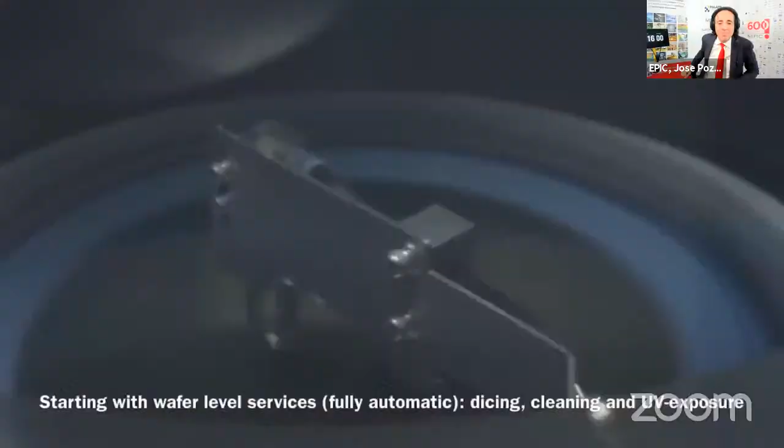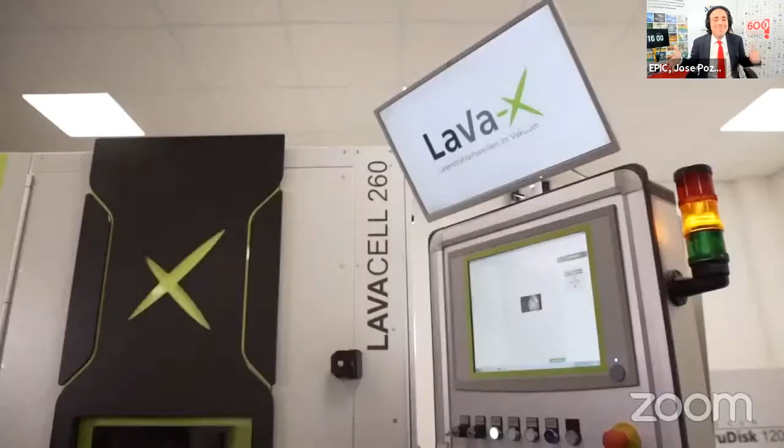Ladies and gentlemen, we are live. I'm super excited today. It is the 30th of March, and most important, it is 2 days away from my Easter holidays, so I'm in the brightest mood you've seen me in a long time. I have something really special for you: six huge developments of EPIC. I'm really happy to show them to you, but most important, I'm happy to ask them the EPIC question and make sure they tell us what they can do for the other members and what the other members can do for them. It is all about a business connection.

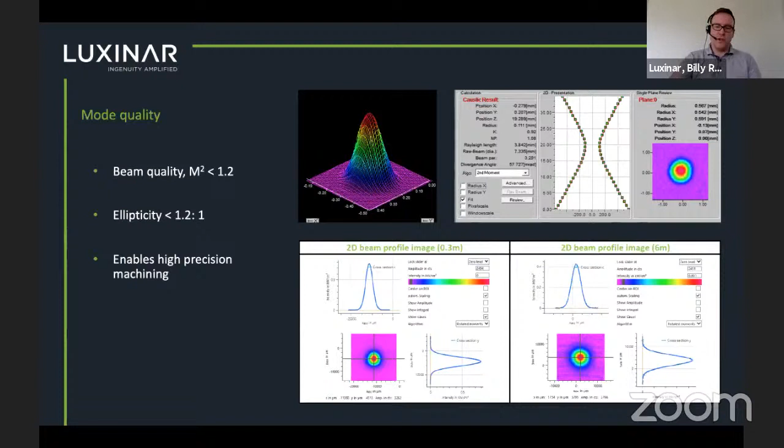Just a quick look at some example applications of material processing using these lasers. First of all, this is comparing a standard CO2 laser with a CO2 laser with integrated AOM for machining of 3-layer polarization film. You can see on the right-hand side, the material processing with the CO2 laser with AOM produces approximately 30% less heat-affected zone compared to a standard CO2 laser with longer rise and fall time pulses.

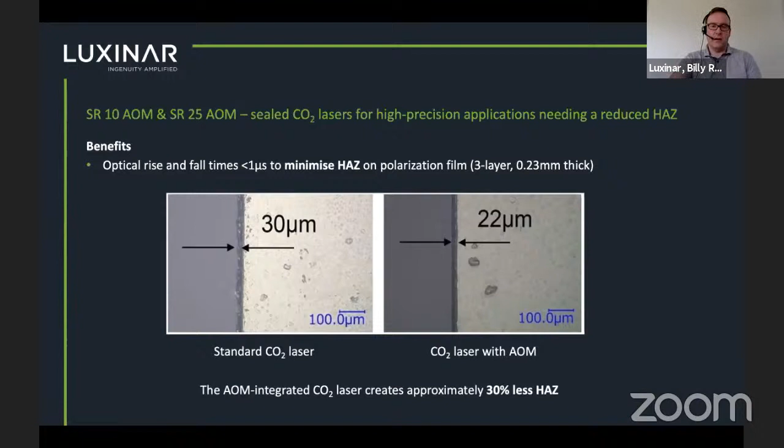Similarly, looking at a 5-layer film here, this is a material where you would only partially process the material, so only some of the layers of the film you would want to process. A problem that can occur with these materials is that the layers will melt and stick together with the neighboring layers. But using a Luxinar SR25 AOM laser here, you can see that you get a much cleaner cut quality compared to a standard CO2 laser.

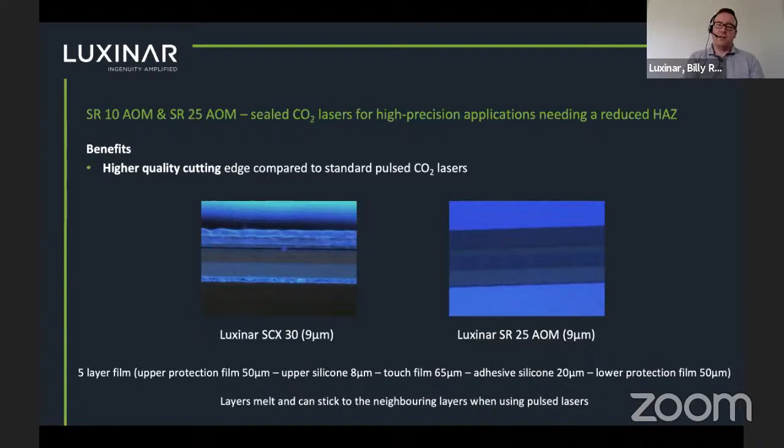And finally, it's a similar story here with heat-sensitive indium tin oxide layers. They can suffer discoloration and also poor cut quality using long rise and fall time pulse CO2 lasers. Again, here we see a vast improvement in the cut quality using an AOM laser.

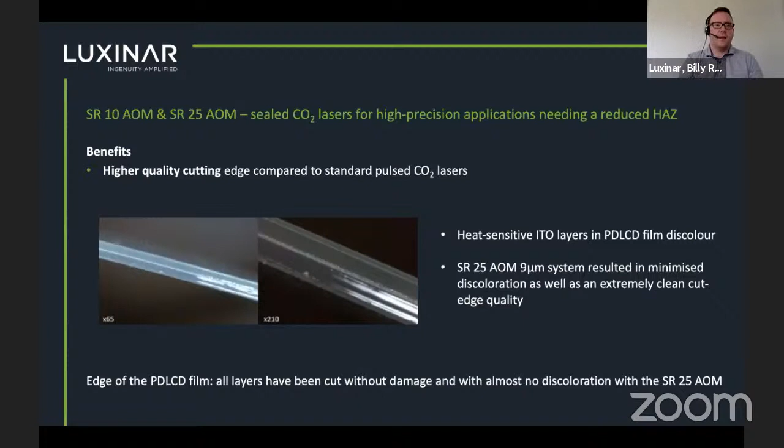So applications that these systems may find themselves useful for include microfilm cutting in the flat panel display market. For example, backlighting unit is a very common material that is processed using these systems. Any kind of scribing, engraving, marking, or surface patterning application that needs a reduced heat affected zone - depending on the particular material being processed, this can be very important. And then other thin film applications, such as those in the automotive, electronics, lighting, flexible packaging, and flexible printing industries. Again, kiss cutting is a very common application for these systems.

So just quickly in summary, this is Luxinar's new SR AOM range of CO2 lasers with very fast optical rise and fall times of less than 1 microsecond for high precision processing, energy control, and reduced heat affected zone. Available at wavelengths of 9.3 microns and power levels of 75 watts and 150 watts. Pulse widths available are from 2 microseconds all the way up to CW, and they incorporate power loop control as standard for enhanced stability.

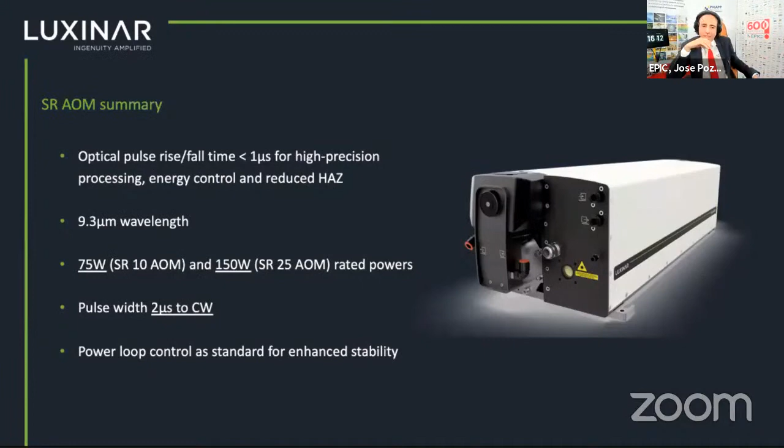Sure. Billy, I was very excited to see the kind of power that you can reach with your laser, and also you talked about the M squared, you mentioned I think it was 1.2 in your presentation. But for many of the applications you were targeting, it's not only about the power, but about the power stability. Do you have some metrics on that, something to share with us about the power stability of the AOM range?

We are seeing the market for laser engraving growing dramatically for larger and larger engravings, and I think that's really the sweet spot for this laser. Have you seen new applications in laser engraving, perhaps in the medical or other application fields, that made you particularly excited?

Yes, so we see some new interesting applications. We have our larger customers, so we have the standard typical applications that we cater to, but we are also seeing more niche and interesting applications coming in as well. Especially as we broaden our product range, new applications are emerging all the time.

Low heat, high precision, fantastic beam shape. If you're looking for a CO2 laser, consider the AOM line from Luxinar.

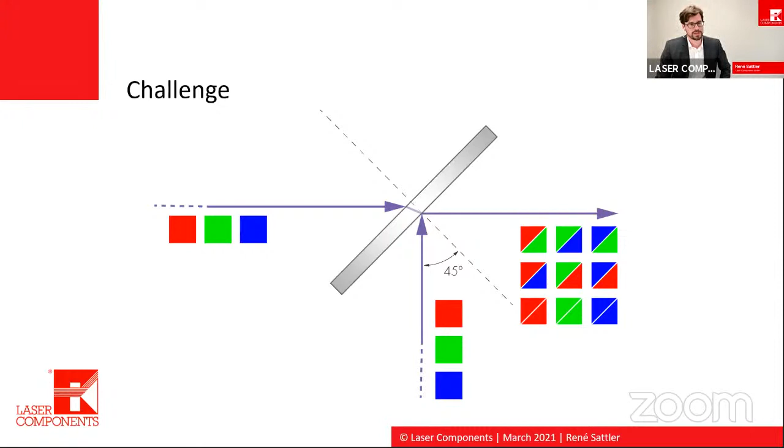So our customer came to us. He produces laser projectors for three different colors, so red, green, and blue. You can see an old version of the projector here. But there was a challenge: the customer wants to combine two lasers from two paths. In each path, it can be one out of three colors, either red, green, or blue. In the output, the customer expects to get all possible combinations of the colors. So they want to get red and green, and blue and green, but also wants to have the same colors combined, like red and red, and so on.

The standard approach to combine two lasers is a dichroic. But this dichroic will not work for the same colors, as you can see here. You may ask why the customer wants to combine the same colors. The answer is simple: the customer wants his projectors to be flexible, and combining two same colors will just increase the intensity or contrast.

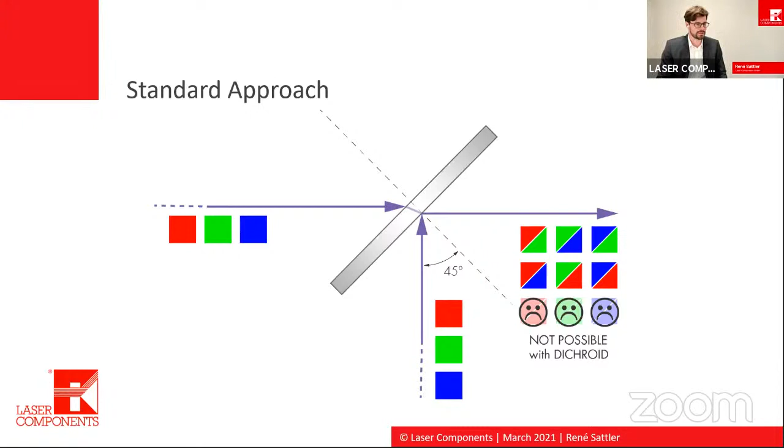So we designed this trichroic thin film polarizer, and here are the coating details. On the left-hand side you can see the spectrum. The green line is the reflection for P polarization. In the red, green, and blue wavelength ranges we have low reflection, so red, green, and blue are transmitted for the P pole. The S pole reflection always remains at high values.

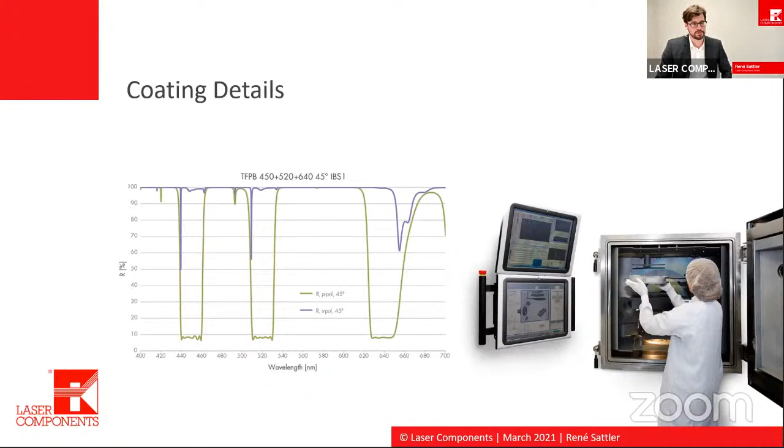In the end, we will also increase our capacity for such coatings because we will get a large IBS chamber this summer. With this large chamber, it will be possible to produce several hundred pieces of this trichroic thin film polarizer in one coating run.

So with this I'm already coming to the conclusion. At Laser Components we have well-educated sales engineers. We understand customers' challenges and find solutions. All our coating development, and also the complete machine park, is driven by customers' needs. What I showed you before is just one example, and there are many more. So you can say we are specialized in challenging demands and apparently impossible inquiries. Please challenge us, it is our business. Thank you for your attention.

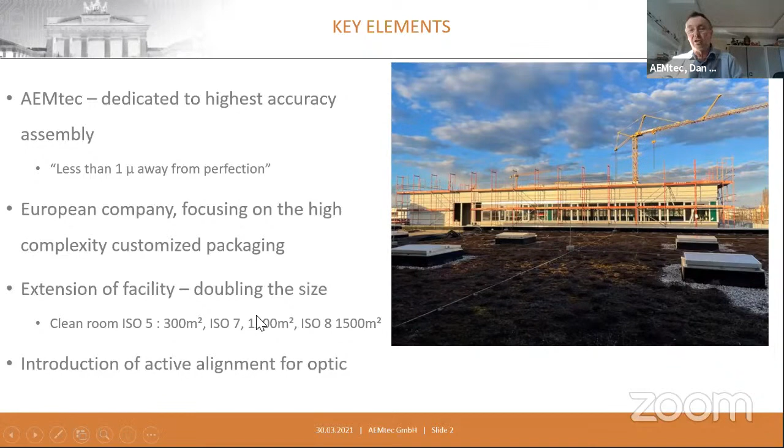Small and medium quantities means up to a couple of tens of thousands of such products a year. In the worst case, or the highest level, it's something like a couple of hundreds of thousands. But the technology I'm going to talk about today is the active alignment that we are introducing.

Where does this push come from, and what are the drivers? We had in the past, and we have right now, a lot of projects requiring alignment of optical components in the range below 1 micrometer, with respect to the absolute perfect position that you can find only in your computer simulation, but never in real life. We're talking about alignment of a VCSEL array, used in a 400 gigabit transceiver. It's a 5-axis alignment that we need to do here.

It's X and Y, so placement, but also tilt around the 3 axes. The Z position is given by the height of the bumps where we make the contacts. One of the main challenges that we had in this one is that the measurement of the position for the alignment is being done through transparency.

So what you see on the picture on the left side is one of these measurements through transparency. As you can easily recognize, there are plenty of levels of grays, shadows of yellow and gray here, which make the recognition quite tricky.

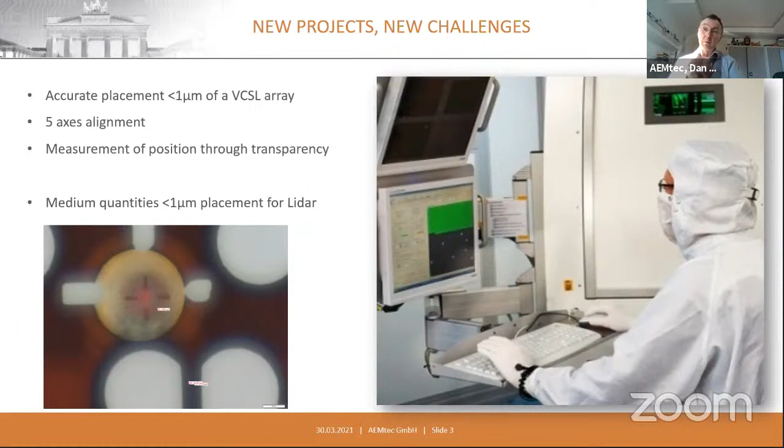At the other end, another project we are looking at is a LiDAR project. We are talking here about placement of multiple elements within 1 micron away from the absolute precision. So definitely not simple things to do.

That's the reason why we decided that we have to go one step ahead. In the past, we were fully believers that passive alignment is probably the best thing that you can do. But definitely we learned better.

Also, because one key driver, and I'm going to talk about this a little bit more, even if I'm a technical guy, I'm going to talk about money. It's the cost effectiveness that we need to achieve here in order to keep Europe as a leader in this kind of packaging. So we went into a deep cooperation with AIXEMTEC and looked at their product.

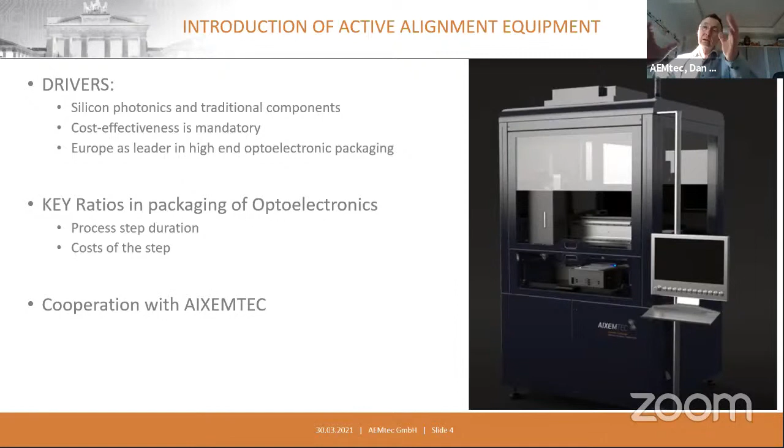And this is the product that we are about to acquire. It's a machine that has been designed by them and then modified a lot in order to have all the versatility that we need in order to get different projects correctly solved.

Where are we in this process? We are talking about the introduction of the equipment. Everybody who did it knows that the more complex the equipment is, the more difficult it is to introduce it. So starting with the first introduction, with the first setup, this is being done at AIXEMTEC. They are putting in place the process, they make the process turn there. At the moment when the process is ripe and we are moving to series production, then the machine moves to us and we are handling then the series production.

Once the machine is there, then we are going to go to the typical qualification process, the IQ, OQ, and PQ, where, of course, we are counting also on having several months of hard work up to the moment when we get it. So this is going to be, from a time perspective, in the third quarter of this year, where the clean room is already extended and the machine has its new emplacement. And we expect to be full scale available for taking projects by end of 2021.

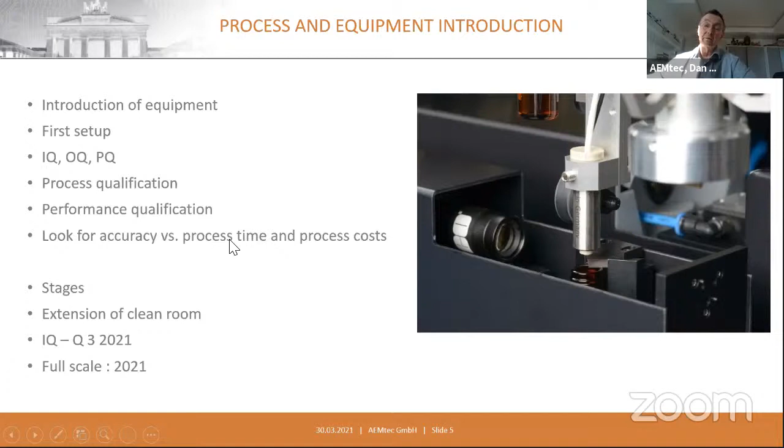Now, I told you I'm a technical guy, but I'm going to talk a little bit about money here. Why the hell did we buy this machine? Well, first of all, you want to have the accuracy solved, which is definitely a challenge by itself. But there is a financial aspect that does make a lot of sense, and this is the following.

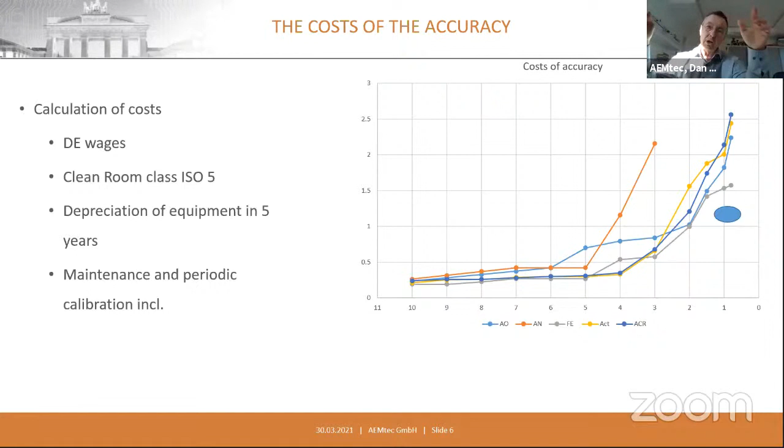How does this work? Well, it works because despite the fact that the active alignment equipment is much more expensive, depreciation is much higher. If you are considering the whole ecosystem, the whole environment, it is the speed that makes the difference. So the game changer that we are going to have here is the speed with which we can achieve this accuracy in the placement.

Normally I get Jose, I make him nervous because I always talk too long. So this time I decided to have really just a couple of slides.

I'm ending right now with a wrap up. So AEMtec, we're targeting the sub-micron applications. We are targeting in a cost-efficient manner, I'm insisting on this one. Focusing clearly on the low and the medium quantities. And of course, made in Europe.

Why should you work with us? Because if you go into business with us, you can take really the best of two worlds. One is that you have the competence of a technology organization, our people are really dreaming technology. But on the other hand, this technology comes in the whole package of an industrial-based company, which means all the business processes behind it, all the worries about what kind of ship is navigating across the Suez Canal, all these worries related to the business and function of the company are already taken care of. So highest technology possible, but in a perfect organization, able to serve series production.

3, 2, 1, I'm done. So thank you. 3, 2, 1, I'm done.

Thank you very much, Dan, for being with us today. It is really quite fascinating. I would like to ask you many things, but the first thing is obvious, right? Epic meeting, epic question. What can you do for them? What can they do for you?

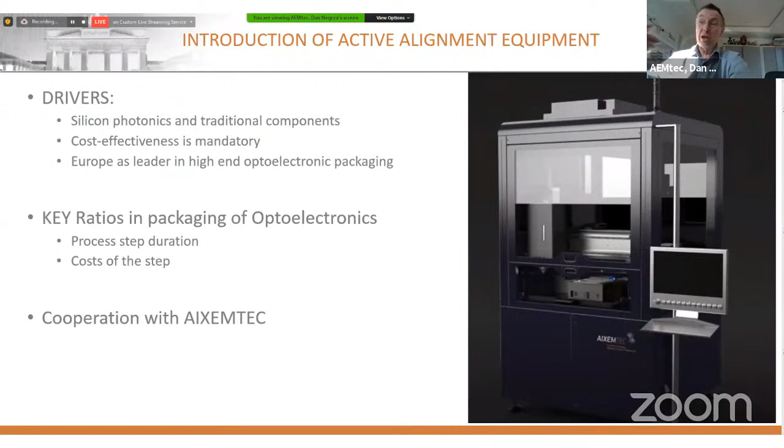This is exactly the point. The reason why we looked into this machine is because we are facing a lot of completely different challenges. And you cannot face different challenges if they are in the small and medium quantities, you cannot face them having a dedicated machine for each one of them, it simply doesn't pay. This is the key reason why we went to AIXEMTEC, to Tobias, because we said, listen, you have a machine that we can configure together with you as we need it, so that we are able to fit different projects in a very high exchange rate. So the pace of changing from one product to another is very good.

Today I'm making one product, tomorrow I can make another product, and the machine is able to handle this. So it is simply this versatility that we were mainly looking at.

One of the biggest challenges that we are seeing for active alignment on silicon photonics is to align fiber arrays. Fiber arrays with more than 8 fibers is becoming a challenge. There you need 6 degrees of alignment. Is that something you are looking at with this machine? Does it have some kind of hexapods inside to achieve this 6 axis? Absolutely. The first example I gave you is where we have to achieve alignment on 5 axes. And it's not 8 fibers, it's a 10 channel VCSEL that we are placing there.

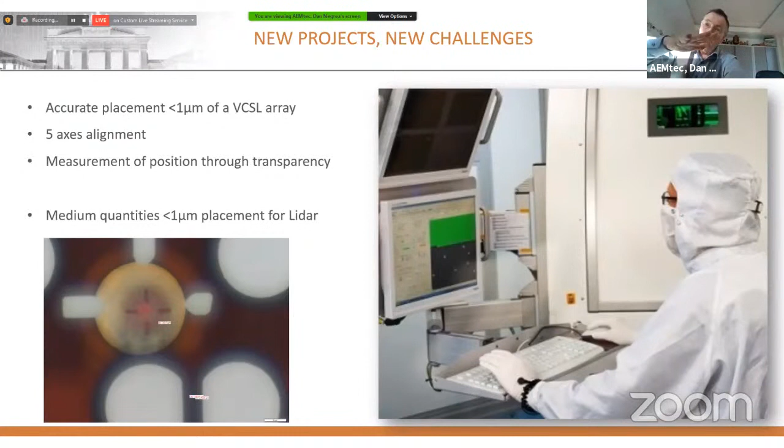This 10 channel VCSEL needs to be aligned X and Y, and then of course the tilt in each one of these directions. Hopefully you can see - I'm a little bit Latin in this respect, trying to talk a lot with my hands.

This kind of alignment you can do only if, in addition to the rest of the machine, you have a clever hexapod. Every hexapod is clever, but you have to have it cleverly controlled so that it allows you to adjust the different aspects of the placement.

Congratulations on what you're achieving. I'm also a little bit Latin, talking with my hands - I don't know if you noticed. Thank you very much for this, because we need these kind of success stories in Europe. We moved from Dan Negrea, my friend Dan, congratulations.

We moved from Dan to one company that always makes me excited, Focuslight. After the acquisition of Limo, they provide laser diodes and micro optics, and with this combination they can do amazing things like beam steering LiDAR. Let's hear about the new product, Focuslight BeamRazor.

With us we have Zhe He, product manager for the LiDAR line of Focuslight. The floor and attention of everyone goes to one of my favorite laser diode companies in the whole world, Focuslight. Zhe He is with us, and he's the product manager. Thank you, and thank you for your invitation. My name is He Zhe, project manager at Focuslight, and today it's my honor to present to you the latest progress of line laser transmit module for beam steering LiDAR.

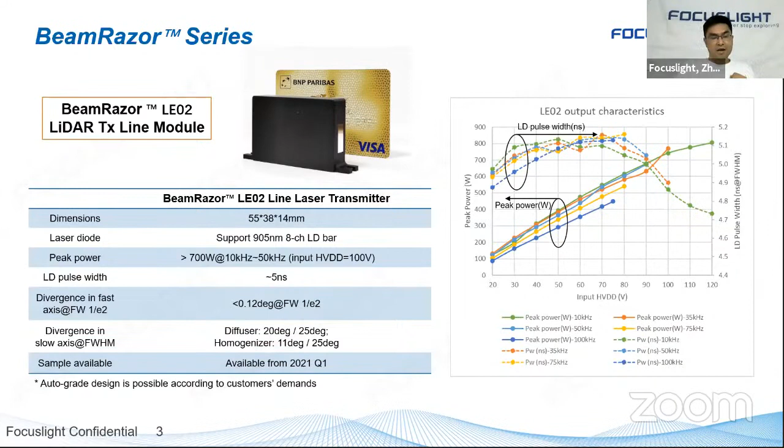The newly released module named LE02 has a large range of power and divergence choices. The peak power is up to 700 watts with a frequency from 10 kilohertz to 50 kilohertz, and the pulse width is around 5 nanoseconds. The divergence in horizontal and vertical directions could be customized. And with such high peak power, the module size is quite small, even smaller than a credit card.

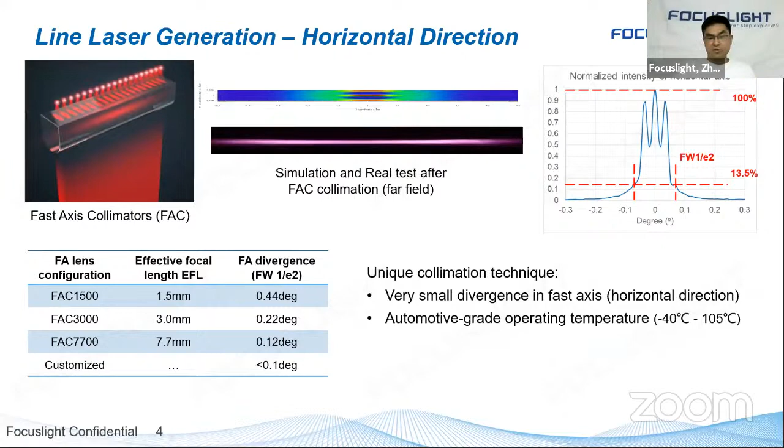In the horizontal direction, using Focuslight fast axis collimation lenses, the divergence of the laser diode could be squeezed from 30 degrees to smaller than 0.4 degree, or even lower than 0.1 degree according to customer specifications. In the other direction, Focuslight recommends a diffuser or homogenizer, which has very high uniformity up to 90% and can realize a large FOV design. All these lenses are very suitable for automotive grade applications.

In this part I want to give you an example. We wanted to characterize the optical stability, so we monitored the variation of divergence over a large temperature range from minus 40 degrees to 105 degrees. The variation of divergence is due to the mismatch of the CTE of multiple materials. Smart material selection and optimization of optical design and processes could help reduce this variation. By now, Focuslight has modified the configuration to obtain very small variation.

Moving to the next topic, the reliability of the module is another critical topic for automotive application. We have started tests such as temperature cycle tests and vibration tests, and by now the test results demonstrate that the divergence has little change.

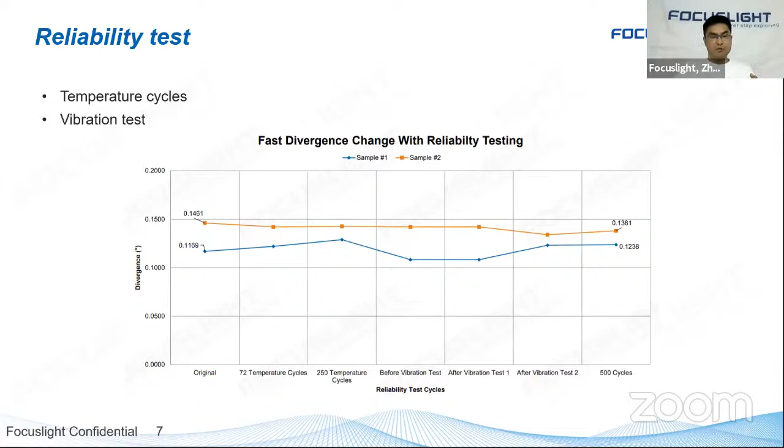So at last, I will give you a brief introduction of Focuslight. The Focuslight technology was founded in 2007, and is a great global provider of high-power laser diodes, micro-optics, and photonics application solutions. Right now, Focuslight has 4 facilities situated in China and in Germany.

In 2020, Focuslight launched the world's first full solid-state 3D flash LiDAR laser module named AL01. It's in mass production for tier 1 level. In the same year, Focuslight obtained the official certificate IATF 16949. In the LiDAR market, Focuslight can provide a lot of services, including optical components and laser transmitters, as well as assembling services.

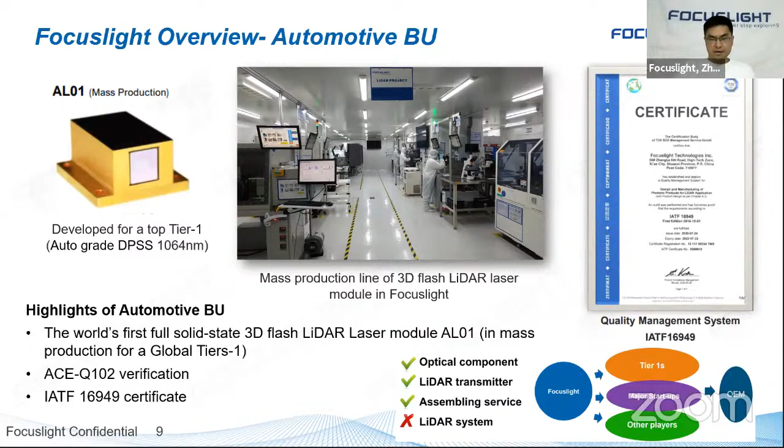By the way, the LiDAR system is not included in this business. So that's all for my presentation, and thanks for attending. If you have any questions or demands, please don't hesitate to come to us. Thank you. This is your WeChat QR code, and of course you also have an email address, which is in the slides. If you want to get in touch with any of the participants today, please don't hesitate to contact me, and I will introduce you to any of the participants.

But it is an epic meeting. So you know what's coming, right? The epic question. Yeah, what is your answer?

So for our module, LE02 is very useful for LiDAR application. We think this is a very good solution, because compared with mechanical rotating LiDAR that uses multiple laser sources, to replace this complex laser proposal, Focuslight provides a solution that's much simpler and more efficient. This one just uses one single light beam, which is very useful. Then we can use a rotating mirror or one-dimensional MEMS to combine with the transmitter, and this is very useful. For the receiver, we can use SPAD array or other receivers.

And right now we have a lot of projects with our customers for customizing the line laser beam transmitters.

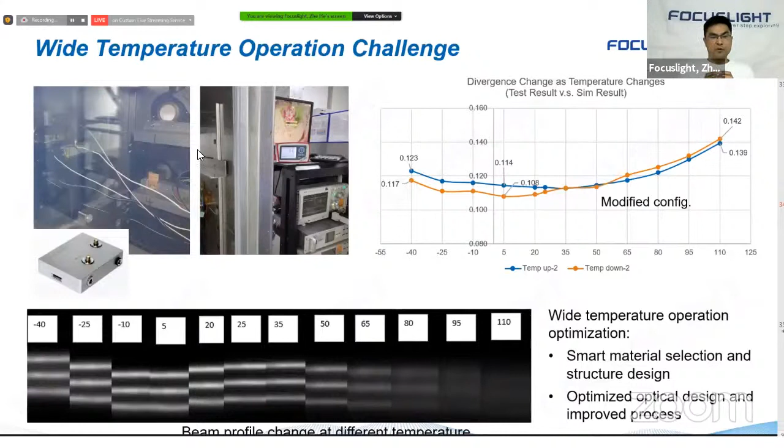This means that the divergence of the horizontal axis will change over a large temperature range. So if you want to keep the performance of the LiDAR very stable, you should reduce this variation as low as possible. Right now we are trying to figure out some engineering ways to reduce these factors.

We only have 2 presentations left. Everything that is fantastic has to come eventually to an end. Still 2 presentations. The first one is from a company that we all love. When we talk about wavefront sensors, we all love Phasics. When we talk about adaptive optics, I get goosebumps.

Thank you very much today, Nolan Chang, for presenting a new product, which is the Kaleo Kit, which is going to give us wavefront sensing from UV to mid-wave infrared. Nolan, the floor and the attention of everyone goes to the wavefront sensors of Phasics.

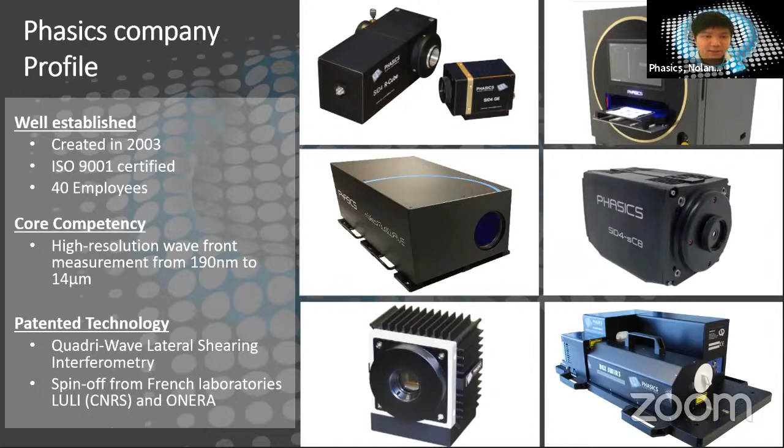Phasics is a French company just south of Paris, created in 2003. We're about 40 employees, and our core competency is providing high-resolution wavefront measurement solutions for UV to IR. Our main technology, used in all of our products, is called quadri-wave lateral shearing interferometry, or QWLSI, and I'll explain just now how it works.

Our systems, our wavefront sensors, are based on the combination of two main components. One is the diffractive grating, which we also call a modified Hartmann mask, and the other is a sensor that can be from any technology like CCD, CMOS, InGaAs, etc., to adapt to the wavelengths you want to test.

How it works is that when you send incident light—like a flat wavefront or a distorted wavefront—it will be diffracted by the grating, and most of the energy will be put into the first orders of diffraction, plus and minus 1 along the x and y axis. These four replicas of the beam will then propagate and interfere on the sensor. What we analyze is basically the modulation of frequency on the raw image of the camera, which we call an interferogram.

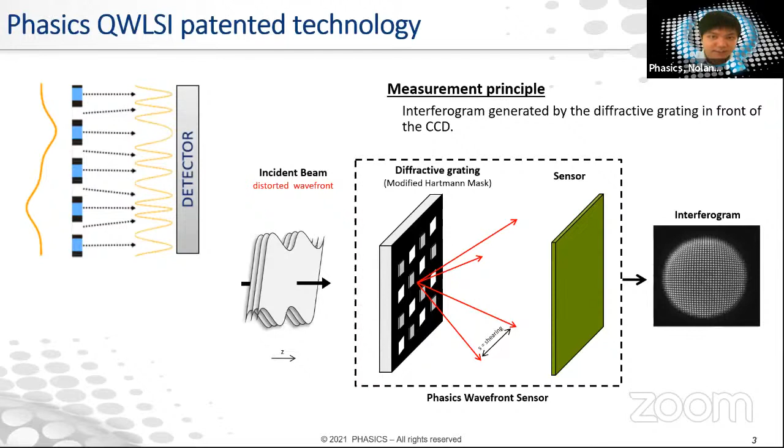There are several advantages to using this technology. The first is, of course, the high resolution, as you get typically more phase measurement points compared to the Hartmann. For example, we can get up to 800 by 700 phase measurement points on a sensor pupil that's roughly 14 by 16 millimeters.

The second advantage is the large dynamic range, which enables us to make not only measurements on large aberrations, but also direct measurements on diverging beams. This is particularly useful when you want to characterize focusing optics.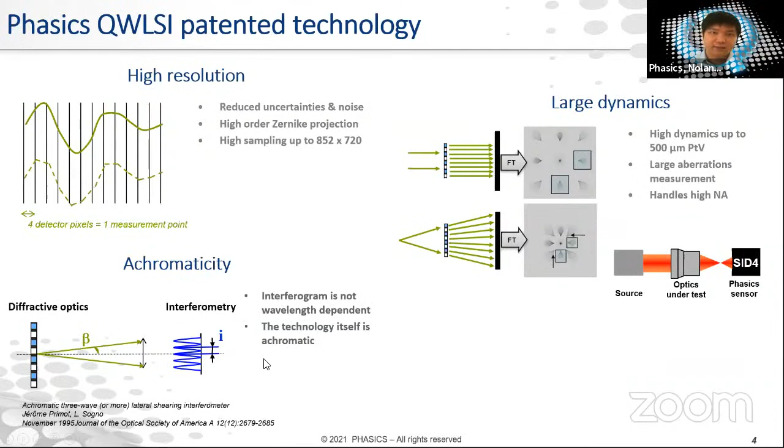The third advantage is achromaticity. The sensor, because it works with diffraction and interferences, is actually achromatic. So the final image you get on the sensor doesn't depend on the wavelength. Using that, it's possible to build a wavefront sensor with the same accuracy for all wavelengths inside the sensor's detection range. So what do we provide?

Phasics provides solutions for laser, optics testing, and microscopy. But today, Kaleo Kit is all about optics metrology. We provide three levels of integration in optical metrology. Of course, we can provide standalone wavefront sensors that people can integrate into their own machines or test systems. We can also provide integrated test machines, turnkey solutions like interferometers, still based on wavefront sensors. And we can also build custom systems to adapt to customer needs.

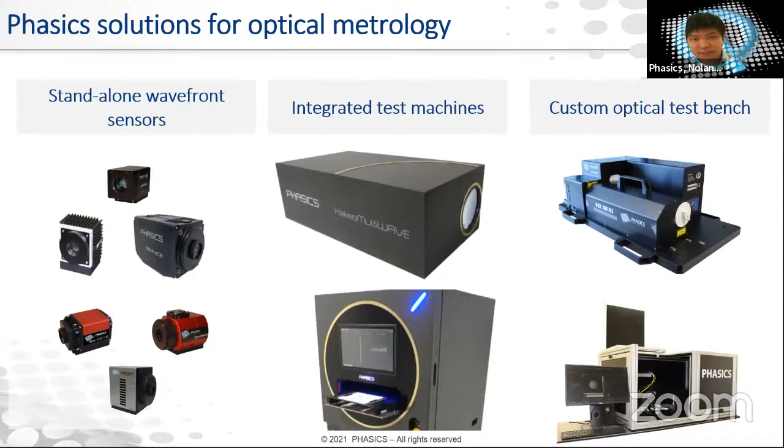But today, the new development we made with Kaleo Kit is a solution in between a standalone sensor and an integrated test machine, providing a standard solution for most measurement requirements in wavefront measurement. All projects are quite unique in terms of measurement configuration—single pass, double pass, conjugation—as well as in terms of wavelengths, pupil diameter, and of course accuracy. The idea is that with Kaleo Kit, we can adapt to that.

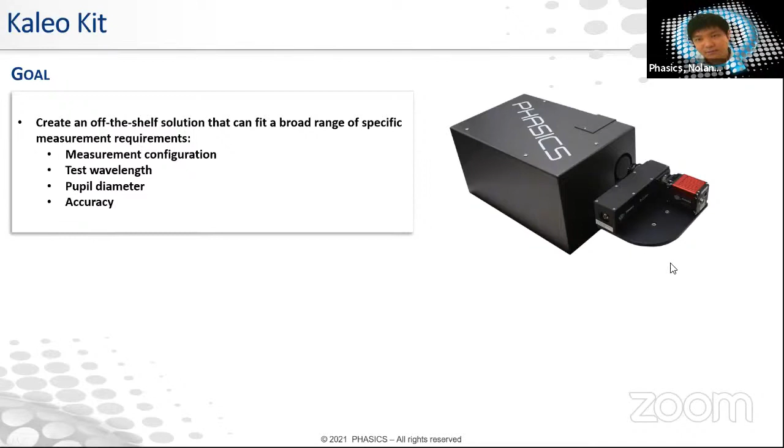So what is Kaleo Kit? We have an image here on the right, an example based on the combination of three modules. One is the sensor. The second is the illumination module, the source that can change with wavelengths. The third is what we call a beam shaping system, either a focusing system or a beam expander, to adjust either to the numerical aperture of the sample or to the pupil diameter of the sample. They all come with a reference mirror, either flat or spherical, to reflect the beam and create a double pass setup.

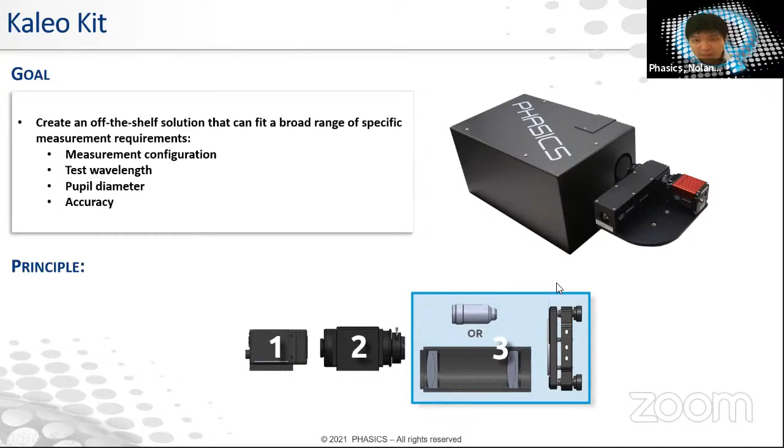An example of configurations or applications you can do with this kind of system is presented here. The idea is that, for example, if I use the source—the illumination module—and the sensor, I can already characterize a telescope or beam expanders directly.

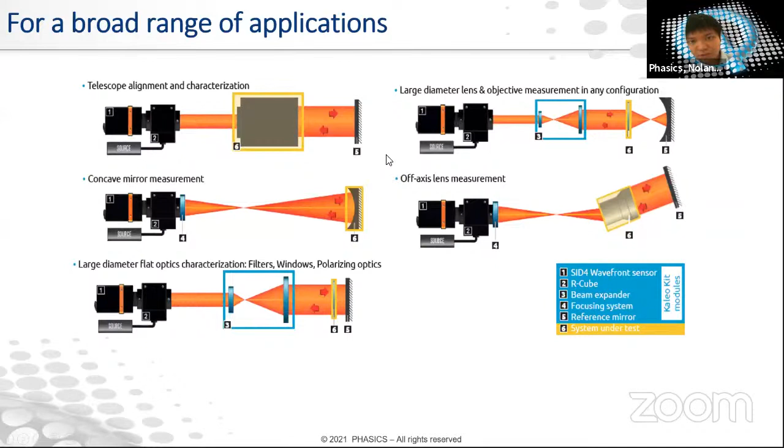But with the same system, I have a cost-effective solution with just plugging in an additional module. For example, a focusing system that we can provide to characterize not only the final system, but also mirrors, like aspheric mirrors inside the telescope that they want to characterize. The idea of Kaleo Kit is that you have a versatile solution you can upgrade and evolve depending on your needs, so you don't need to buy another solution every time. To give an overview, here are a couple of examples of modules we've done so far. We use our regular wavefront sensors from UV to far infrared, coupled with additional illumination modules, beam expanders, or focusing systems, and all coupled with a reference mirror that typically has different qualities depending on what you require.

So in conclusion, Phasics is able to provide all levels of solutions right now. For different outcomes, it can be wavefront, MTF, PSF, on and off axis testing for different configurations, single pass, double pass, or different conjugation types, and also different levels of solutions from standalone wavefront sensors to custom turnkey solutions.

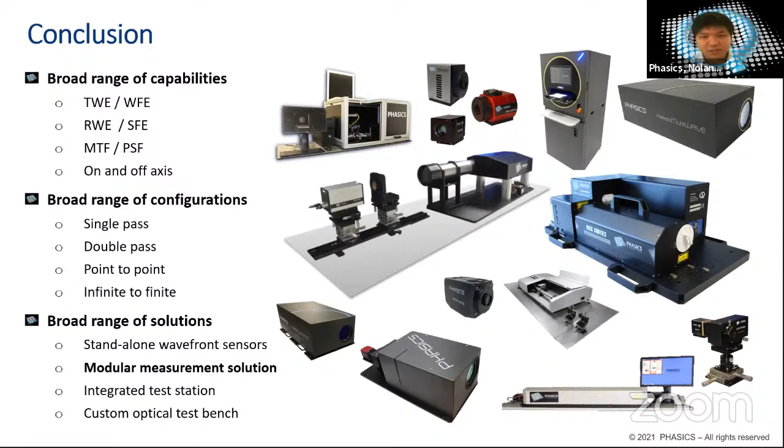So this is just the rough information about this new product. Of course, if you want to know more, please feel free to ask questions, visit our website, or contact us by email at contact@phasics.fr, a fantastic French company.

Thank you very much. You know what I love the most about Phasics? It's always the idea of reconfigurability, the idea of having something that is Lego oriented. I'm a huge Lego fan, and I love this modularity that Phasics is making a difference with. Congratulations. We have lots of companies in wavefront sensing—on top of my mind, Imagine Optic, Optocraft. Phasics is making a difference with this modularity.

Thank you very much. You know what's coming, right, Nolan? The epic question: what can you do for them? What can they do for you? For them, we're always on the lookout for new collaborations, new products, and new projects.

So if they have any measurement requests or measurement projects, we will always be glad to help them with that. For us, we're also always on the lookout for new sources or new high-end optics in terms of wavefront that we could integrate, so that we can complete our range, our Kaleo Kit, or even our integrated test machines.

Let me find you a collaborator. I love doing that. We have Dragan Velkov from Edmund Optics. Dragan, thank you very much for joining the meeting today. What do you have in mind?

Sure, I think there are several challenges, and so I'm looking for a sensor that can bridge the transition between UV and visible—something you can test at 355 nanometers, for example, but then also test at 532. I know there are physics limitations as to what you can do, but that would be of interest. As Jose pointed out, Optocraft and Imagine Optic claim they can bridge that with certain uncertainty or certainty of measurements. So I wonder if Phasics is looking into extending that and improving the measurement uncertainty in that area.

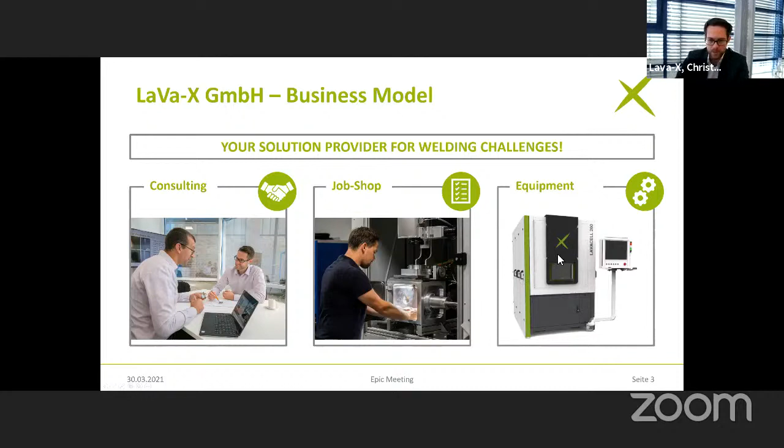Our business model is to be a solution provider for welding challenges, which includes consulting, process development, the manufacturing of pre-series, and at last, to build product-related production machines for laser beam welding in vacuum. Why should you use laser welding in vacuum or at lower pressure?

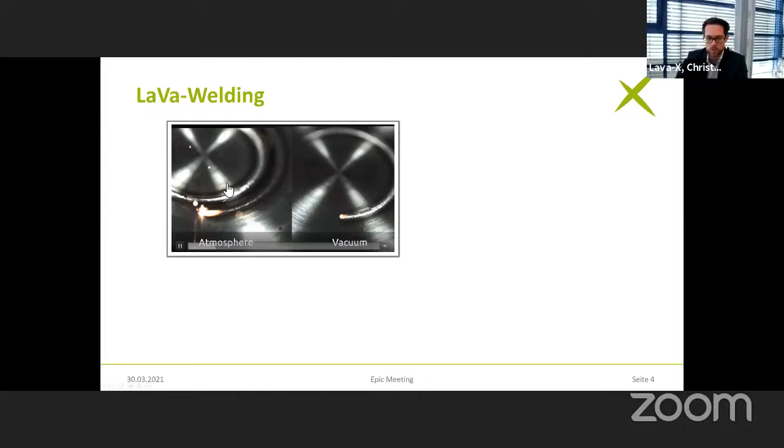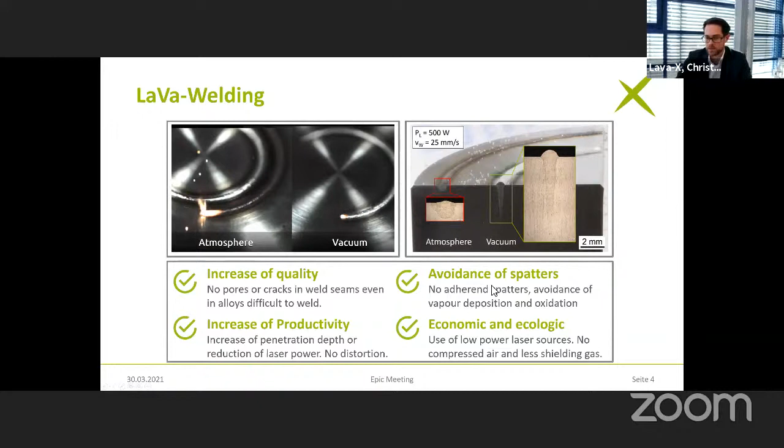This is shown in this video. You see on the left side the normal welding process, with a lot of spatters and the plasma plume. If you reduce the ambient pressure to only 10 millibars in this example, you achieve a smoother weld pool. If you do a cross section, this is the interesting part: in normal welding at atmosphere you also see coloring of the stainless steel, whereas we achieve a higher penetration depth of up to 65%, meaning we can weld 1 millimeter deep in stainless steel with only 200 watt lasers. This is very economical, with less distortion and an increase in beam quality.

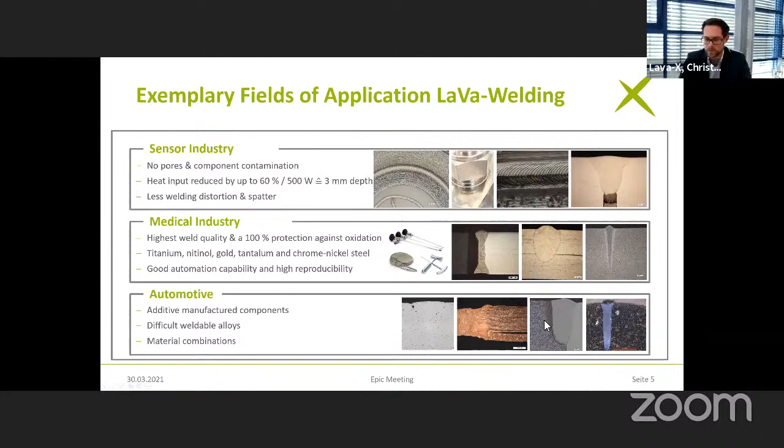Our customers come mainly from the sensor industry, medical industry, and in recent years, a lot of customers from automotive, where we weld, for example, 3D printed parts, steel, copper, and aluminium, and mixed materials like aluminium to copper or similar.

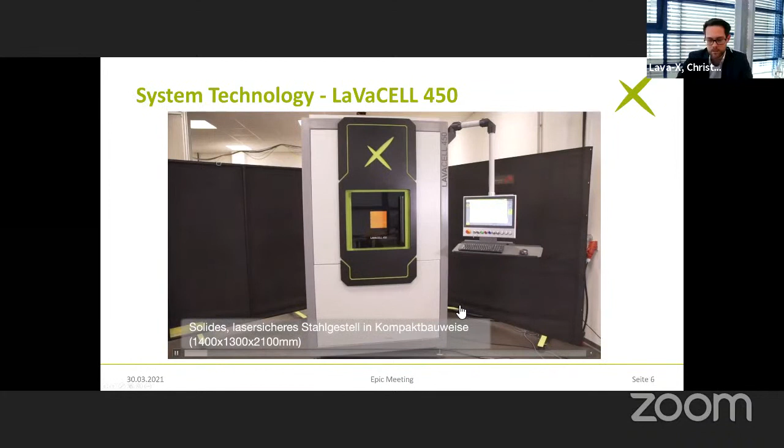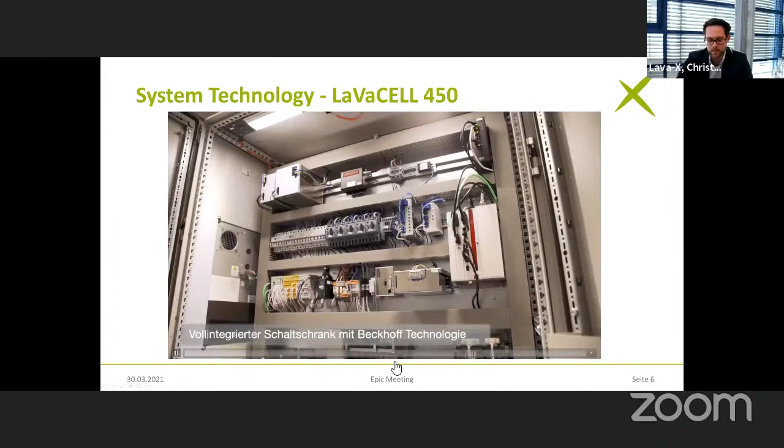This video shows our new product, which is a turnkey-ready laser welding vacuum machine. It has a very low footprint of only 1,400 by 1,300. We built the cabinet ourselves, using Beckhoff technology to do that, and the safety is also included in the Beckhoff. We have servo motors to use for manipulation, and this is the chamber.

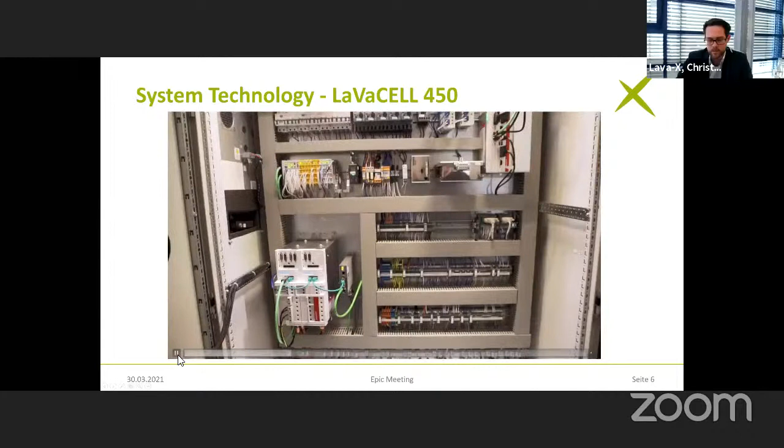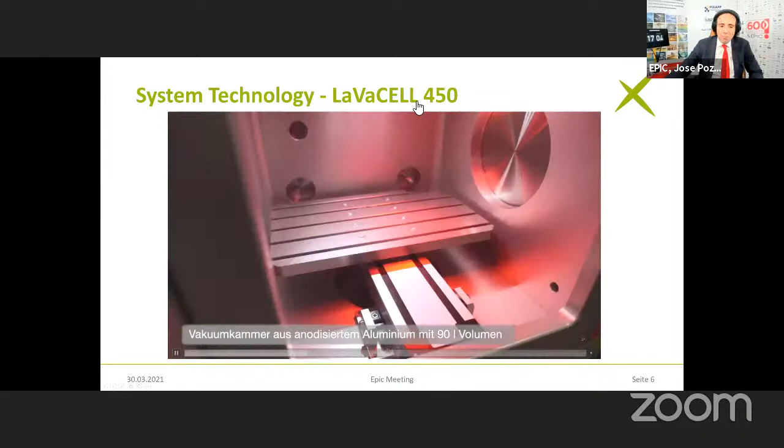The chambers contain a lot of equipment with image correlation, so we need the red light for automatic finding of the seams. If you have radial welding or axial welding, you can use this motor here.

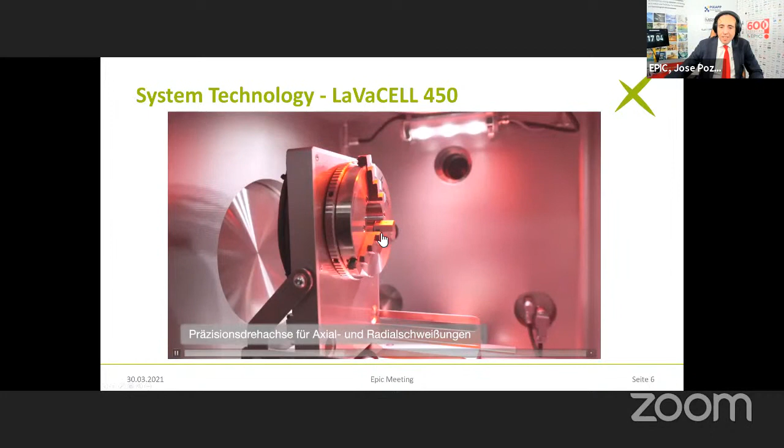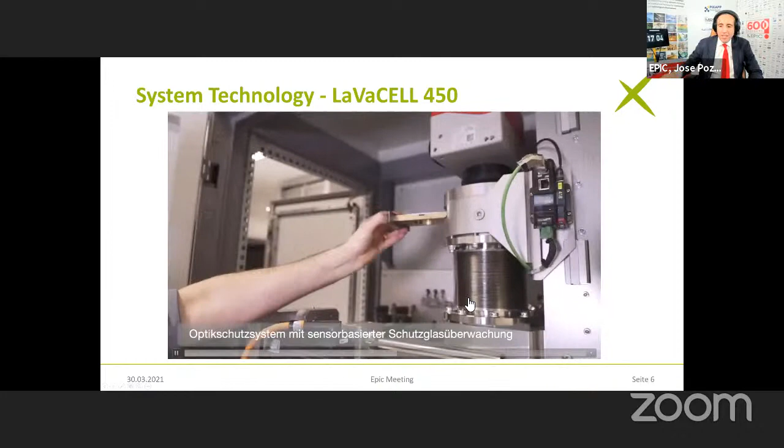We can use different gases because for some customers it's interesting to use helium or argon inside their parts. This is the upper axis, the x-axis, and the z-axis is outside of the machine.

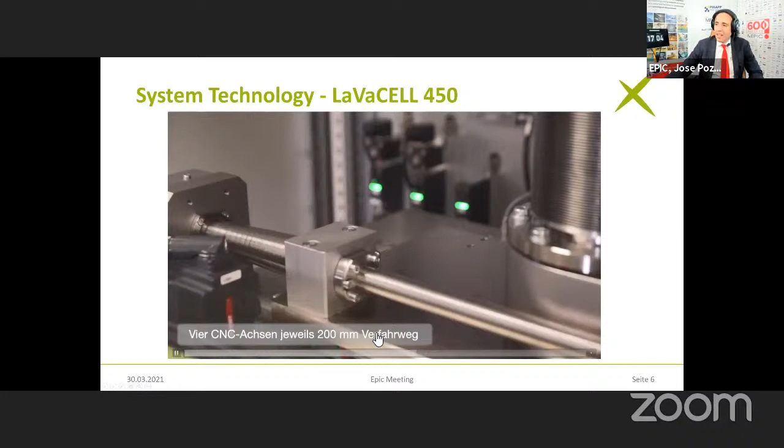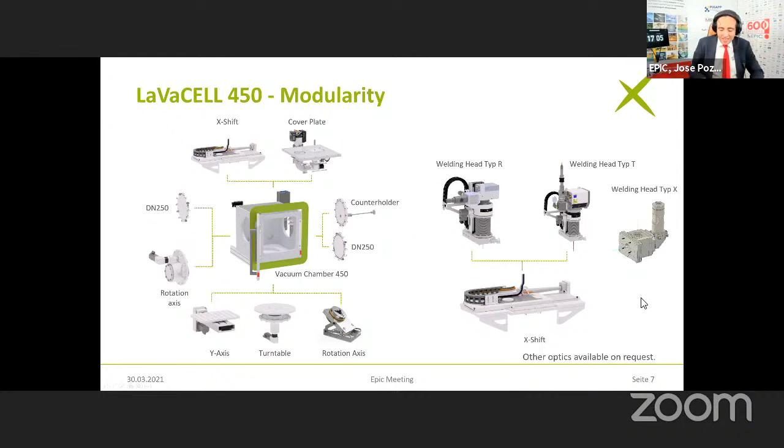This machine is very modular, so our customers can choose from different configurations, different scanner heads, different laser sources. That's our modular turnkey system.

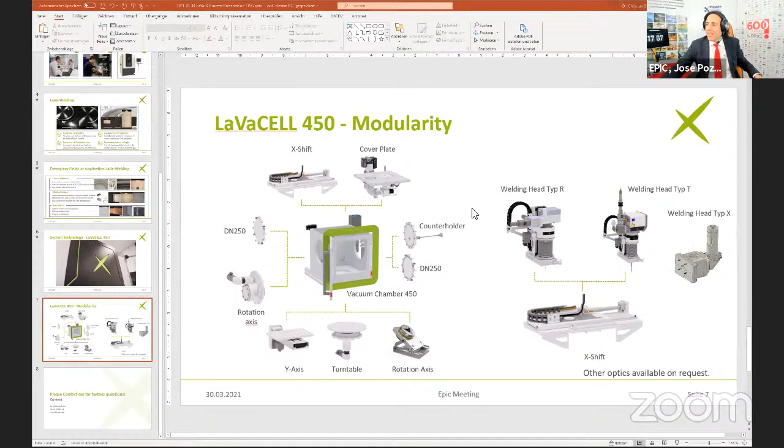But do you expect every customer to have a completely different laser machine for laser beam welding? Because the variety is so huge. For example, we weld very small sensors or big bus bars, 4 millimeter copper deep, radial welding, axial welding. Every product is special, so this modularity is needed.

We have a question for you, coming all the way from Munich, Laser Components. René, what do you have in mind?

I was just wondering, I don't know if you said this, but which wavelength do you use for the welding? Is this always around 1 micron, or do you also use green for copper, you mentioned, I think? With which wavelength do you have experience?

Thank you for this question. I didn't mention it - we tested also green lasers, but we only use lasers in the infrared spectrum because we only use deep penetration welding, so we achieve a vapor capillary, a keyhole. In our opinion, the green laser light only has big benefit if you weld copper in heat conduction welding, and not in deep penetration welding.

We have organized lots of different events on laser beam welding, and one of the ideas we are seeing now is the opportunity to weld different materials to each other. Is that something you are addressing? Is that a concern, and how can you help your customers who have these kinds of concerns?